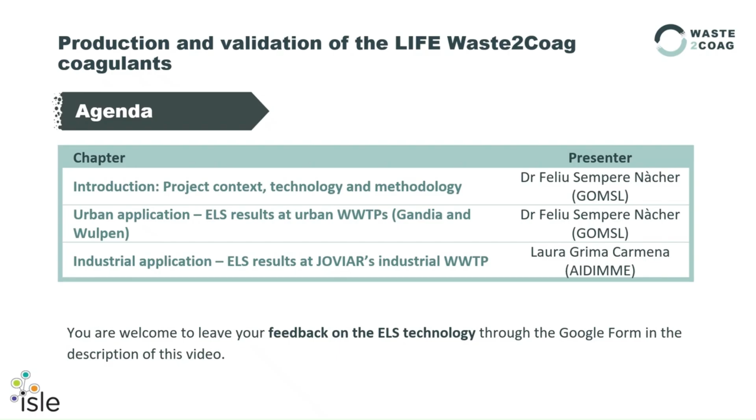Feliu Sempere Nàcher, R&D engineer from Global Omnium. In this presentation of the third webinar, I'm going to make the introduction of the project, outlining the project context, the technology, and the methodology.

LIFE Waste2Coag project had a budget of around 1.5 million euro, co-financed by the European Commission, and it has 5 partners: AIDIMME, the Institute of Technology Development working for the metal sector in Spain; Joviar, an SME manufacturer of technical metal components in Spain; ISLE Utilities, a global independent technology and innovation consultancy from the United Kingdom; Aquafin, a wastewater utility company in Belgium; and Global Omnium, which are the coordinators of the project, working in integrated water cycle.

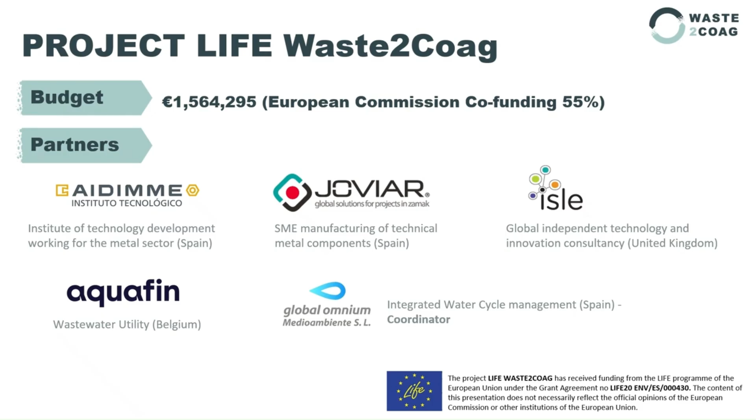The problem we want to solve with this project is the treatment of brines, with a production of around 142 million cubic meters per day produced only from desalination plants, from which 15% of their production is more than 50 kilometers of saline water bodies, mainly in China, USA, and Spain. And these brines are discharged without treatment.

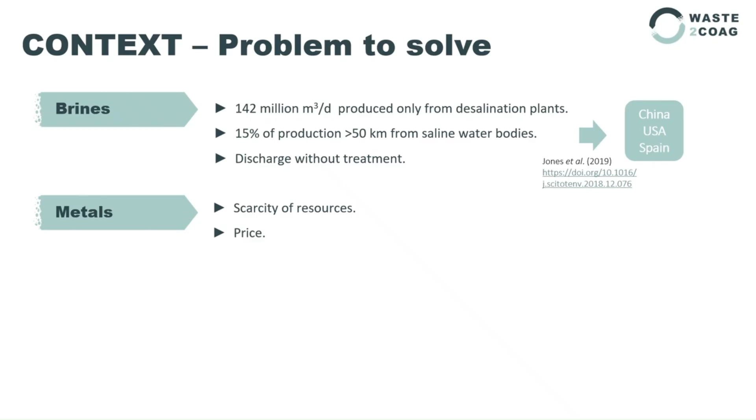We also have a scarcity of metal resources with a high price of these metals. And finally, we have also a high consumption of coagulants for urban and industrial wastewater treatment plants, which requires outsourcing them, with continuous price increments.

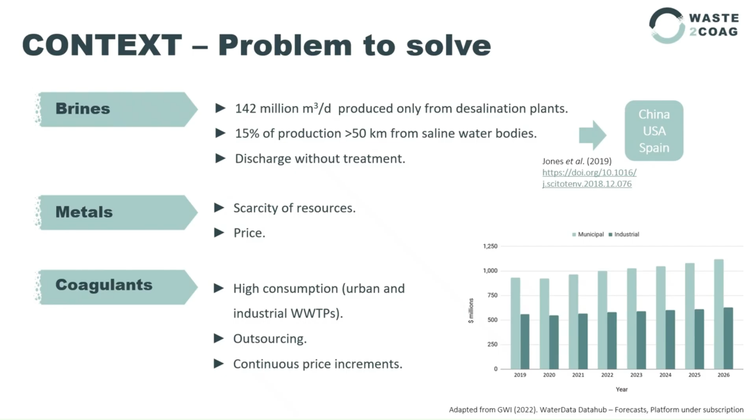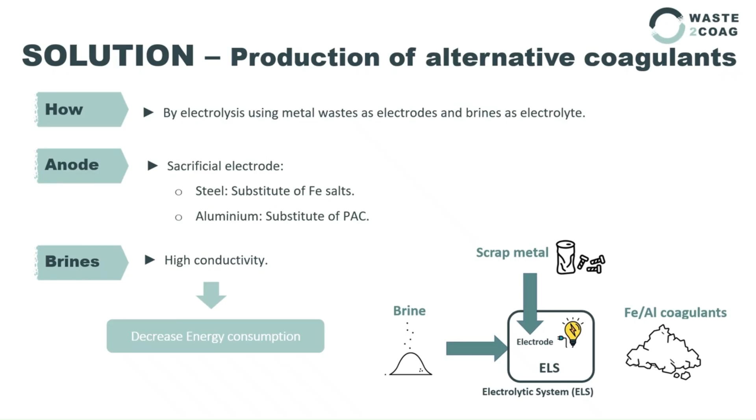Our solution is to produce alternative coagulants. We do this by electrolysis using metal wastes as electrodes and brines as electrolytes. In the anode, this sacrificial electrode, if we use steel, we produce substitutes of iron salts, while if we use aluminum as anodes, we produce alternative coagulants, substitutes of PAC. By using brines with their high conductivity, we decrease the energy consumption to produce these alternative coagulants.

The objectives of the project were technical: to design and construct an electrolytic pilot system, ELS, to produce coagulants valorizing these metal and brine wastes; validate these coagulants treating urban and industrial wastewaters; quantify the impacts by carrying out life cycle assessment and social life cycle assessment studies; and determine the economic potential by conducting a business plan.

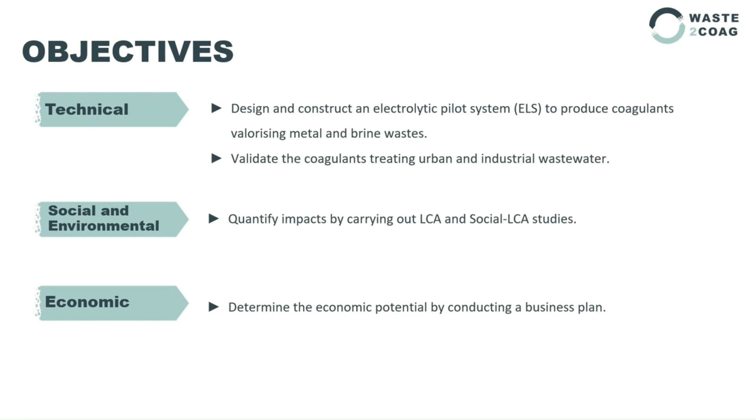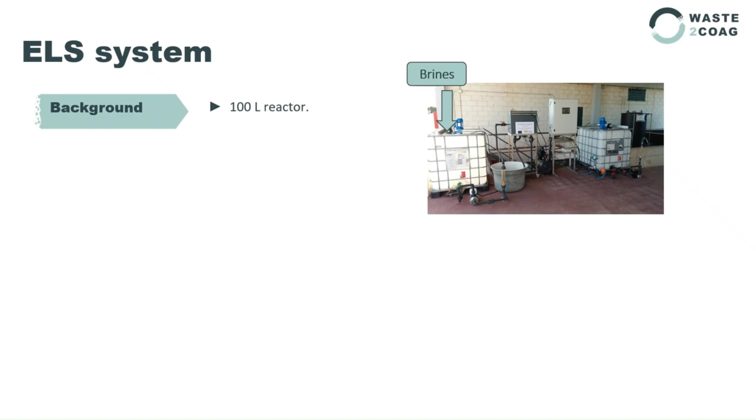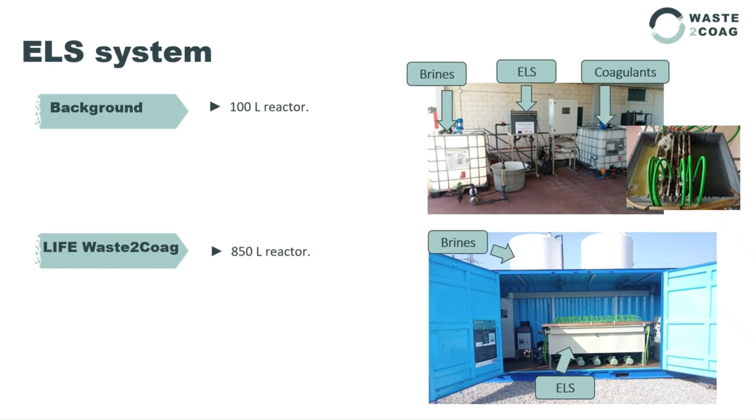This project started some years ago, so there is a strong background. Work started with a 100-liter reactor system, shown in this picture, with an IBC to collect the brines, the electrolytic reactor, and the tank for the coagulants. In LIFE Waste2Coag, the system has been scaled up from 100 liters to an 850-liter reactor with the same configuration: a vessel for the brines, the electrolytic reactor, and also a vessel for the coagulants.

The methodology implemented in the project required different phases, starting with the design and construction of the prototype, a second phase dealing with the optimization of the prototype operation, in which we selected adequate metals and brines to be used in the system.

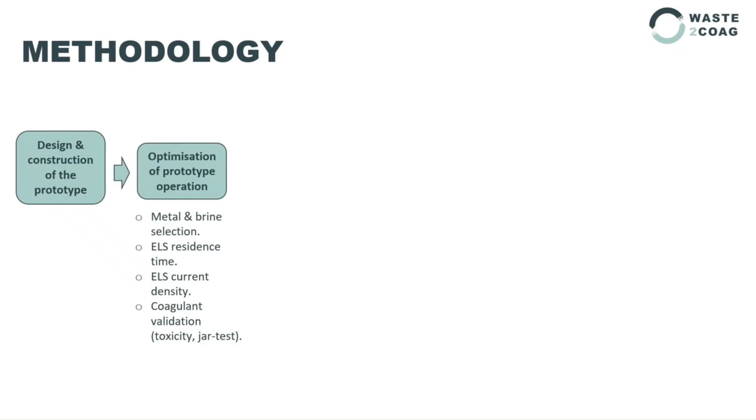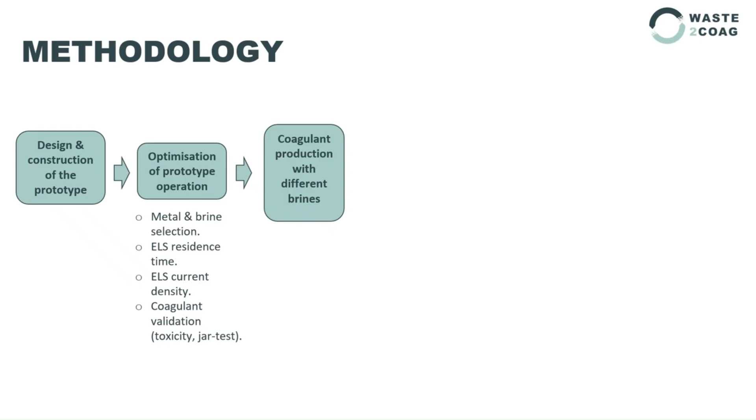We determined the optimum ELS residence time, the electrolytic residence time, the current density, and also the coagulant validation, toxicity, jar test. Once the prototype was optimized, we evaluated the production of the coagulants with different brines.

This has been made with brines received at Gandia Urban Wastewater Treatment Plant located in Spain, using brines from 3 industrial companies. This wastewater treatment plant receives around 26 cubic meters of brines per week, with a conductivity ranging from 30 to 50 millisiemens per centimeter.

Then brines from a company nearby Wulpen in Belgium, Wulpen Urban Wastewater Treatment Plant. These brines come from a drinking water facility really nearby the wastewater treatment plant, producing around 14,000 cubic meters of brines per week, which are discharged to the North Sea, but with a lower conductivity, 5 millisiemens per centimeter.

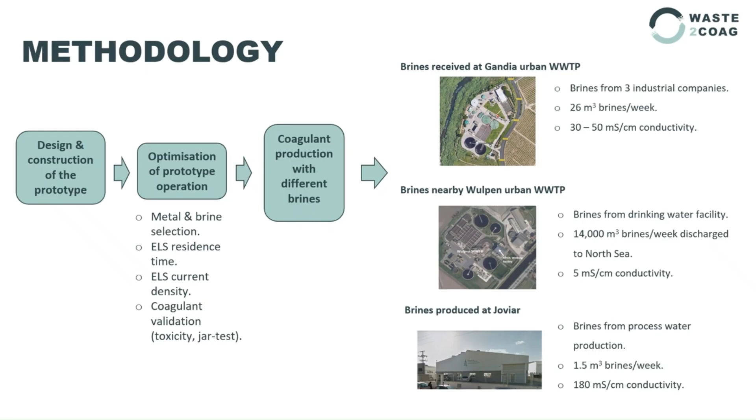Finally, industrial brines produced at Joviar facility, where they have an industrial wastewater treatment plant, were also used to produce the coagulants. These brines came from processed water that Joviar needed for their production process, producing around 1.5 cubic meters of brines per week, but with a very high conductivity of 180 millisiemens per centimeter.

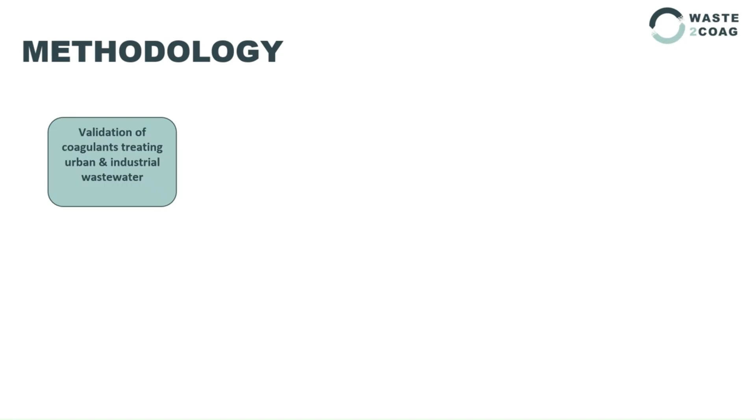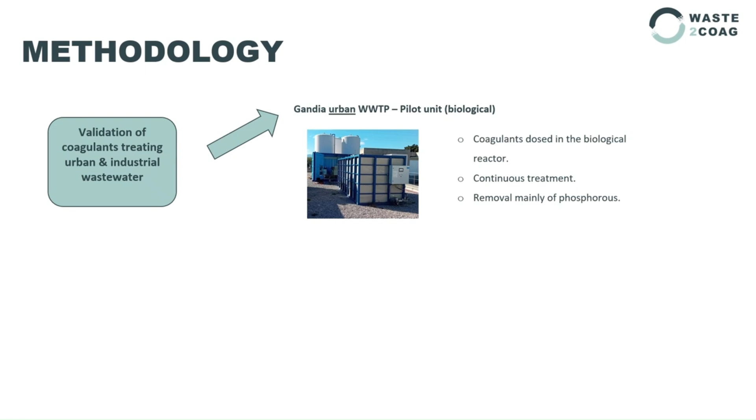Finally, the methodology included the validation of the coagulants treating urban and industrial wastewater. In Gandia urban wastewater treatment plant, the coagulants were dosed in the biological reactor of a pilot unit with continuous treatment, mainly removing phosphorus. And in Joviar Industrial Wastewater Treatment Plant, which is a physicochemical system, the validation of the coagulants was with a

batch treatment, discontinuous treatment. And in this plant, the waste-to-coag coagulant was an alternative treatment to the current coagulant based on lime. The objective of this demonstration was to remove the metals that Joviar has in their waters.

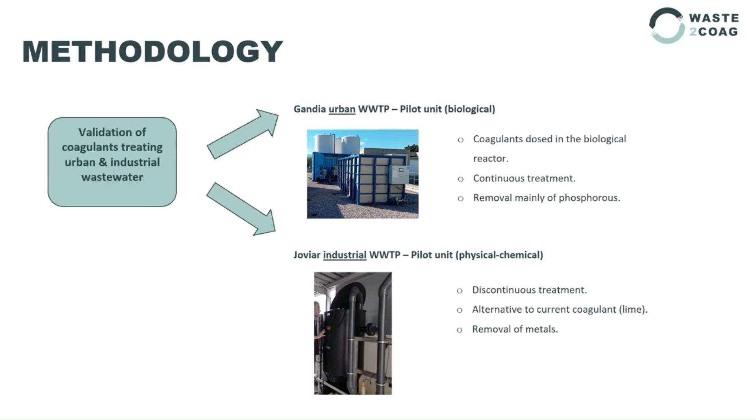Firstly, talking about metal selection, there were quality requirements. Different types of metal wastes were identified. The final selection was based on high purity in aluminium and iron, low price, and suitable shape to facilitate the electrode manufacturing.

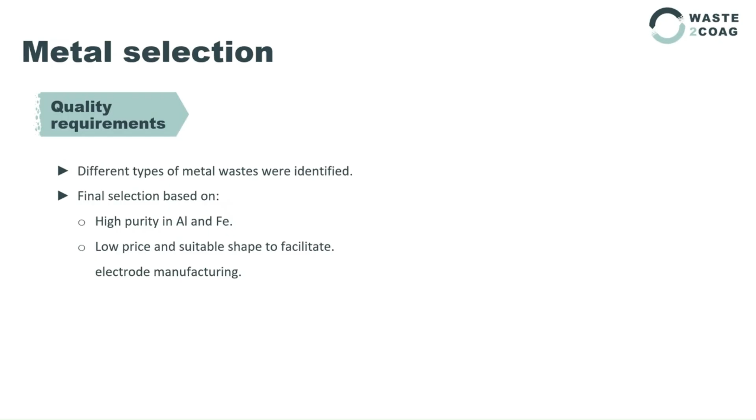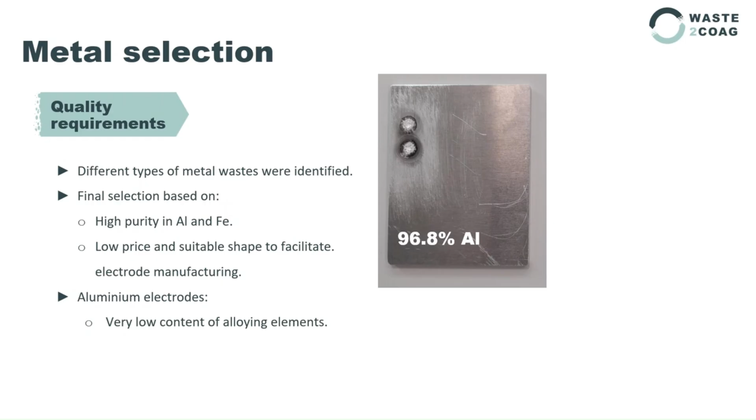The aluminium electrode had a high concentration of aluminium and very low content of alloying elements, and the iron electrodes were not stainless steel nor galvanized and had also a high purity of iron with below 2% carbon and very low content of chromium, nickel, and zinc.

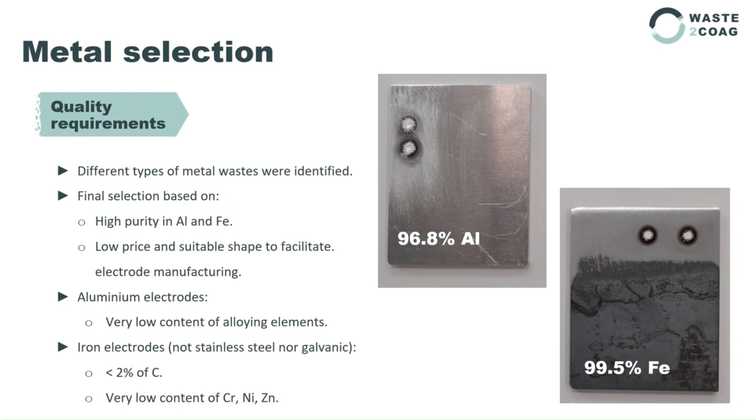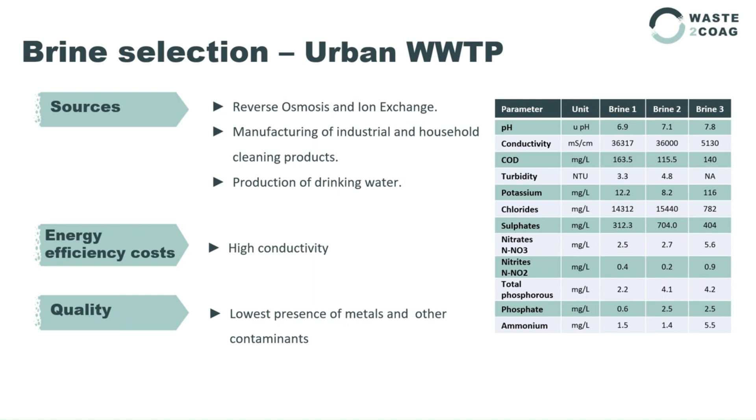In the case of Joviar, the industrial wastewater treatment plant, Joviar has a demineralization equipment which has different stages and separation of streams from resin regenerations carried out once per month.

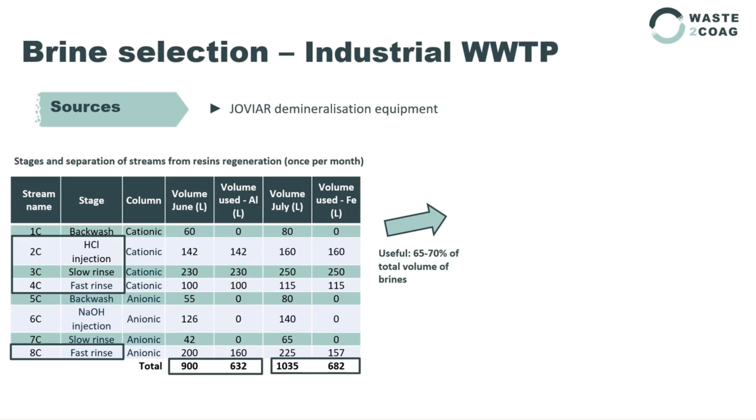In this table, you can see the different streams and stages with different volumes produced. And in this case, not all the stages of the brines were appropriate to be used in the electrolytic system to produce the alternative coagulant. So a range of 65 to 70% of the total volumes of brines, which is a high percentage, was valorized to produce the coagulants.

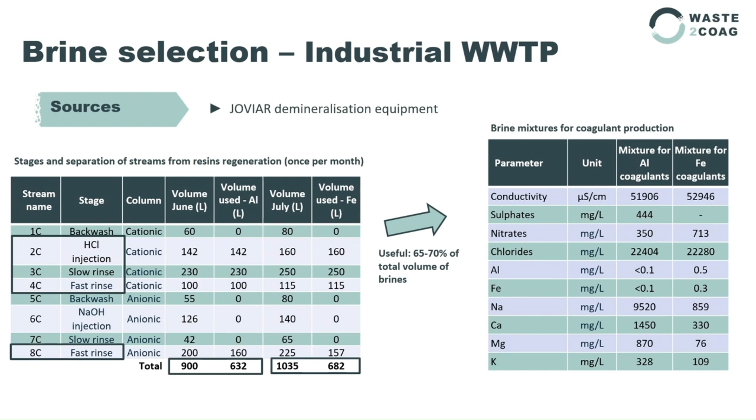This mixture of brines has the characterization shown in the right table.

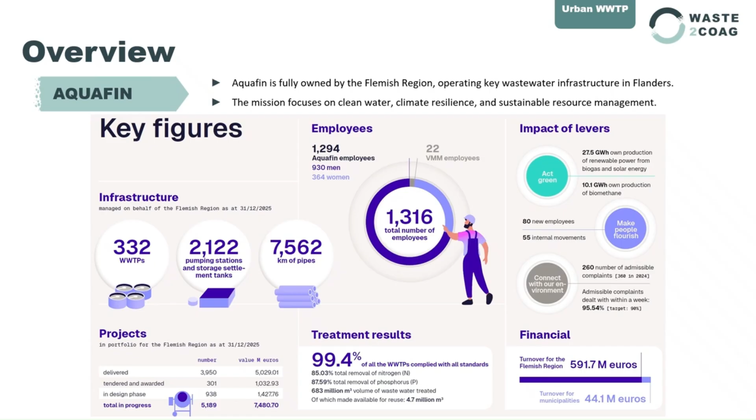Their treatment results show more than 99% compliance with all the standards of their wastewater treatment plants, with a financial turnover for the Flemish region of almost 600 million euros.

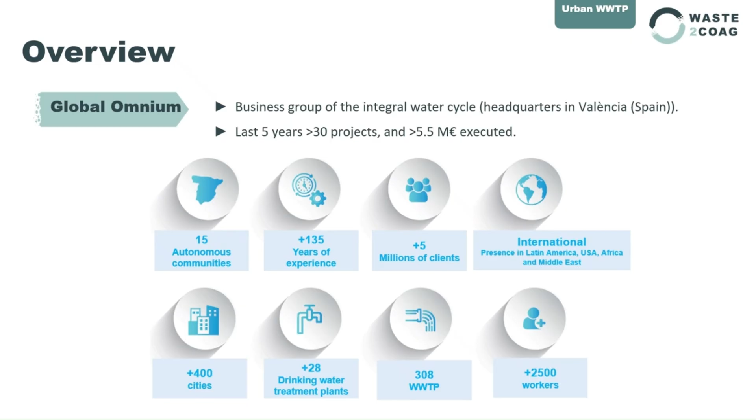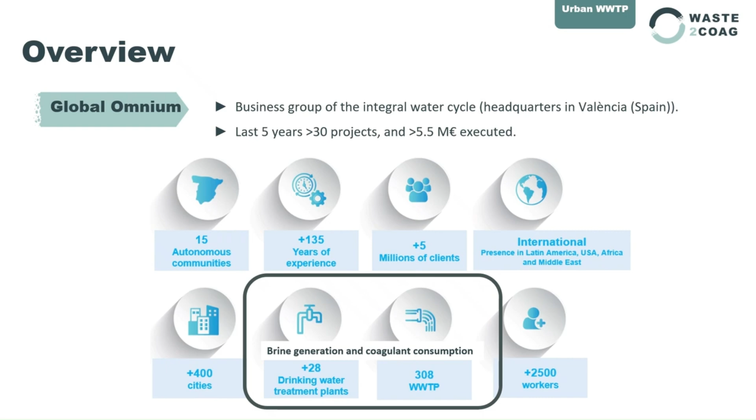Global Omnium, operating Gandia Wastewater Treatment Plant, is a business group of the integral water cycle with headquarters in Valencia, Spain. In the last 5 years we have executed more than 30 projects with more than 5.5 million euros executed. It has more than 135 years of experience, international presence in Latin America, USA, Africa, and Middle East, and it operates drinking water treatment plants and also wastewater treatment plants. So we have brine generation and coagulant consumption in the same company, operating in the integral water cycle with more than 2,500 workers in the group.

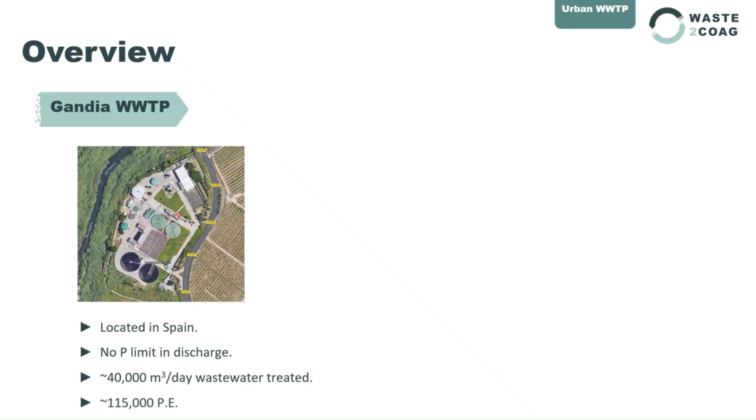Gandia Wastewater Treatment Plant is located in Spain near the Serpis River. It doesn't have a phosphorus limit in discharge since it discharges to the sea, and it treats around 40,000 cubic meters per day of wastewater.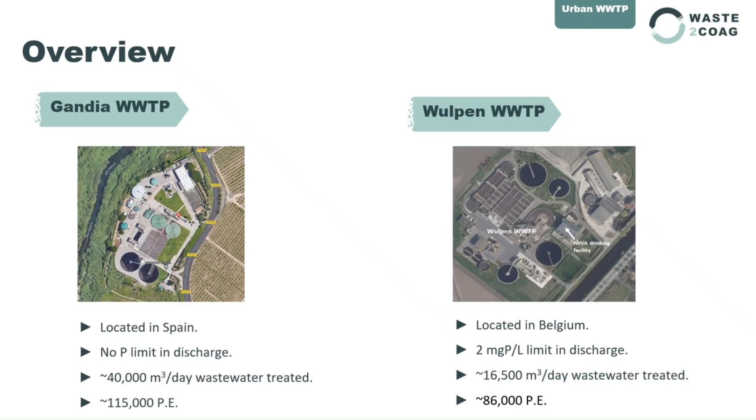Wulpen in Belgium has a 2 milligrams phosphorus per liter discharge limit, treating around 16,500 cubic meters per day of wastewater.

The results of the coagulant production: firstly, we used iron electrodes, but we experienced faster deterioration than expected due to the type of brines treated in the process. We experienced electrode delamination and breakage, which increased the current tension and the energy consumption in the system, implying also an increase in personnel maintenance hours, as you can see in this picture, where the deterioration of the electrodes is shown.

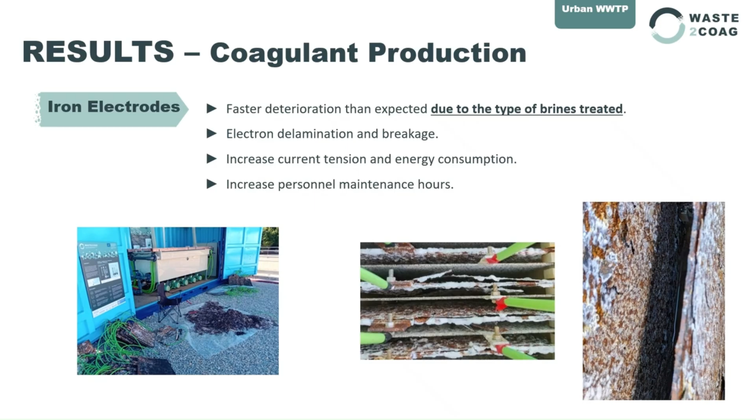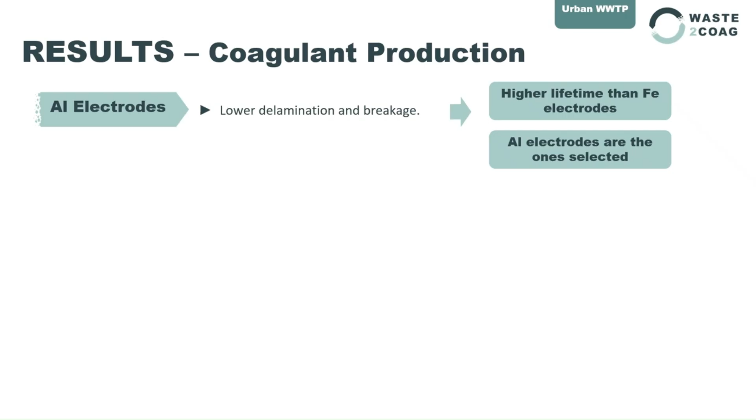On the other hand, when using aluminum electrodes, there was lower delamination and breakage, so a higher lifetime than when using iron electrodes. So the aluminum electrodes were the ones selected to produce the alternative coagulants, hence producing aluminum-based coagulants as substitutes of PAC. In this image, we can see the process.

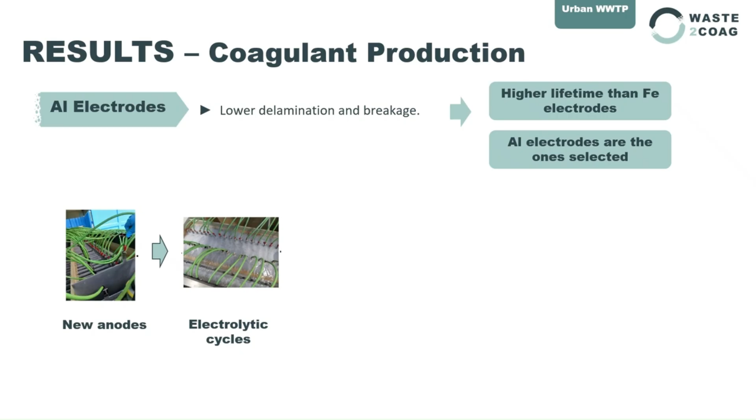New anodes were introduced in the system. The electrolytic cycles were carried out. Once they were spent, the removal of the anodes and cathodes from the reactor was done. Cleaning of the cathode also had to be done, and then the installation of the new anodes and clean cathodes in the system to continue producing more coagulants.

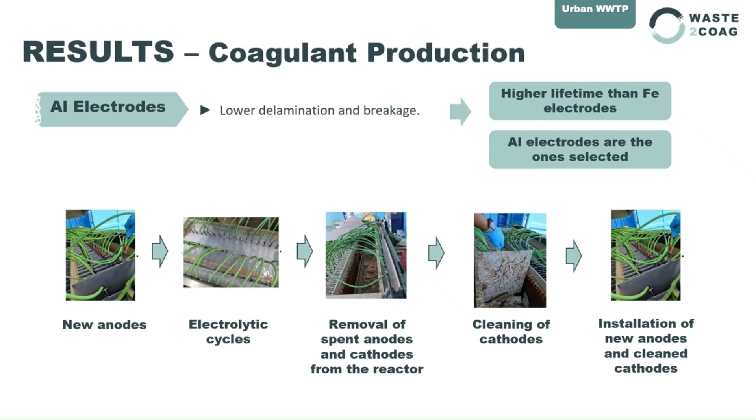About the coagulant production, in this graph we can see the metal concentration, the aluminum concentration, versus the electrolysis time for the two current densities applied. What we can see is that, as expected, the higher density produced higher metal concentrations in the coagulants.

During the production of the coagulant at the higher current density and at 2 times the minimum contact time applied, it was obtained a metal concentration in the coagulants of 977 milligrams of aluminum per liter using the brines of Gandia, and 910 average concentration using the brines of Wulpen.

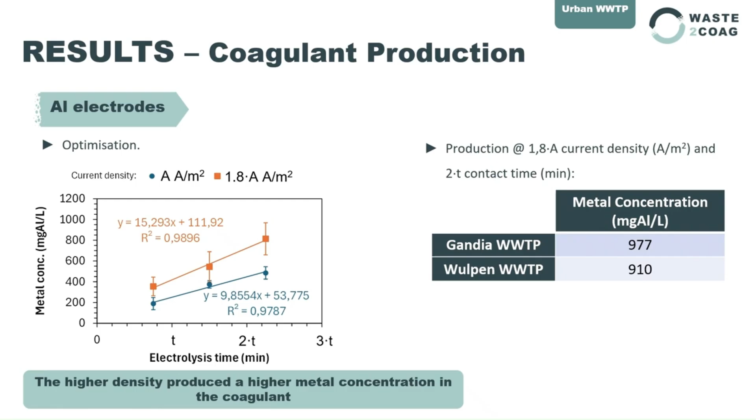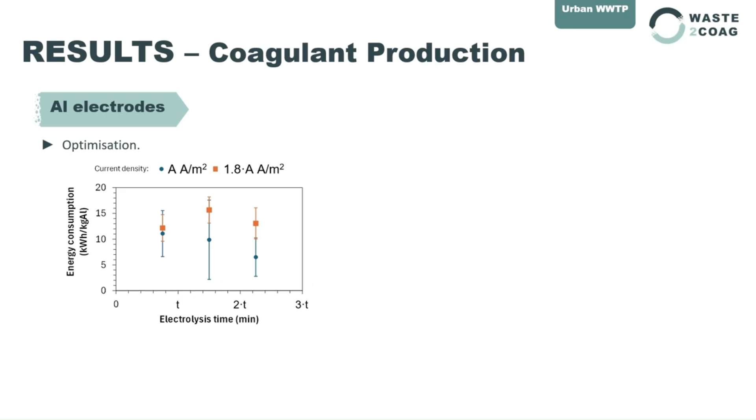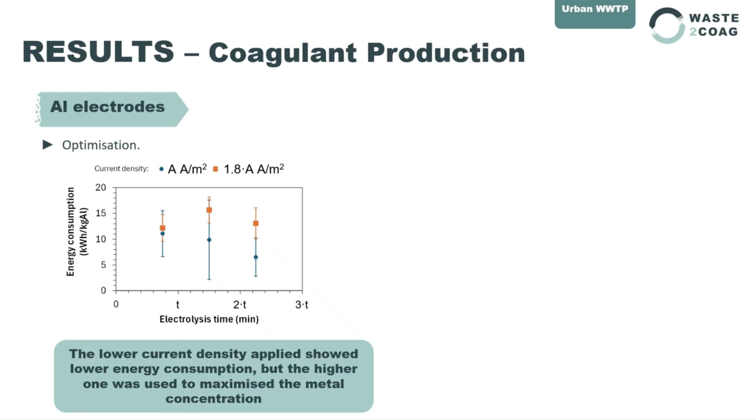In this graph, we can see the energy consumption versus the electrolysis time for the same current densities applied. What we see is that the lower current density showed lower energy consumption, but the higher one was used to maximize the metal concentration in the coagulants.

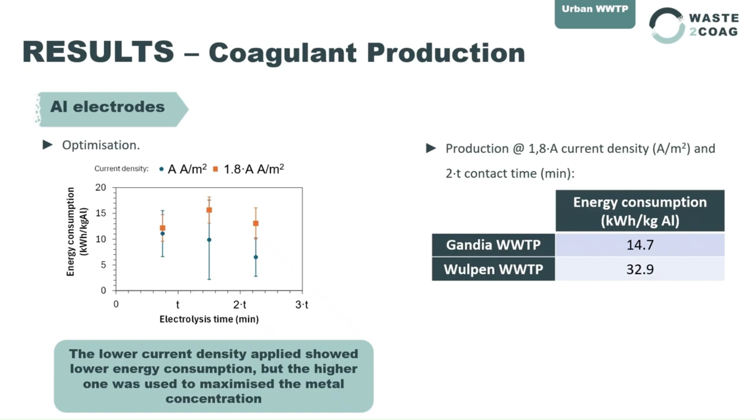During production, as we can see in this table, Gandia wastewater treatment plant had brines with higher conductivity, so an energy consumption of almost 15 kilowatt hours per kilogram of aluminum was obtained, while in Wulpen this energy consumption was higher due to the lower conductivity of the brines produced there.

To guarantee a safe application of the waste-to-coag coagulants in urban wastewater treatment plants, respirometry tests were carried out to evaluate toxicity on both autotrophic and heterotrophic bacteria. This was done using different samples of activated sludge and adding a concentration of the waste-to-coag coagulant using different types of brines. What we can see in this table is that the ammonium uptake rate was higher when using the waste-to-coag coagulants with the two types of brines tested, and also the heterotrophic respiration was higher when using this coagulant, which means the coagulant didn't inhibit the biological process. This guarantees a safe application in the system.

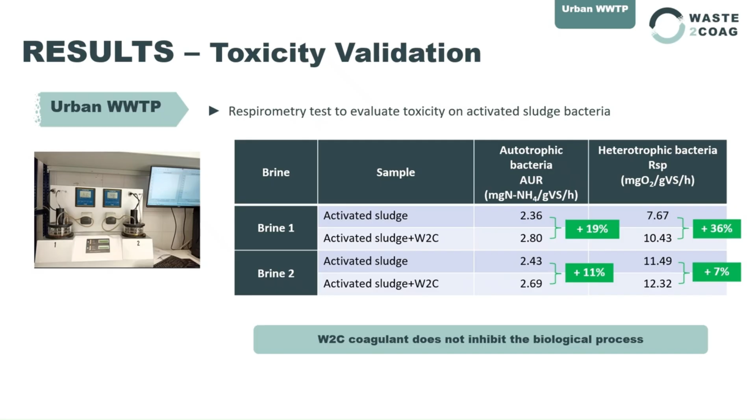Also, jar tests were carried out at different aluminum concentrations, targeting phosphate removal, with selected doses from 5 to 20 milligrams of aluminum to be scaled up during the application in the pilot.

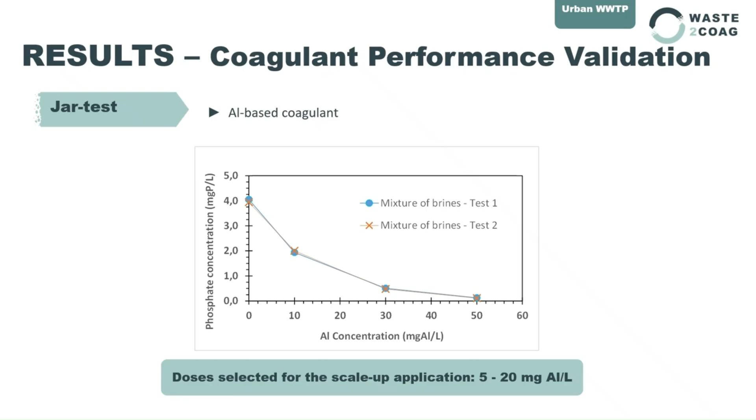The operating conditions during the validation treating urban wastewater in Gandia were to produce the coagulants as mentioned before, with the objective to reach the maximum aluminum concentration and to have a higher valoration of each volume of brines. The applied current in the electrolytic system was fixed with a higher current density using aluminum electrodes and the higher contact time to maximize aluminum concentration.

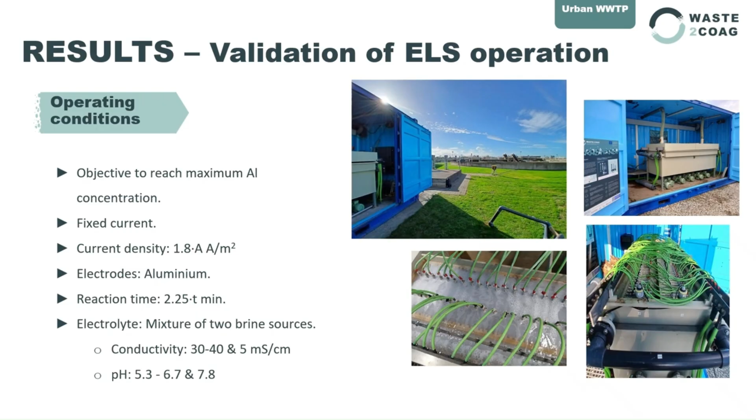The electrolyte was a mixture of two brines with conductivity ranging from 30 to 40 millisiemens per centimeter and pH ranging from 5 to 7. You can see in these pictures the prototype installed in Wulpen and in Gandia.

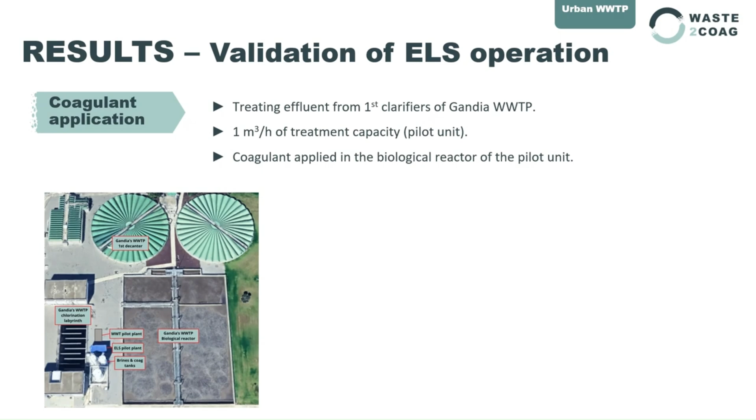The coagulant application was done in Gandia, treating effluent from the first clarifiers of Gandia wastewater treatment plant. The treatment capacity was set at 1 cubic meter per hour, and the coagulant was applied in the biological reactor of the pilot unit, which we can see in this picture, with a static clarifier.

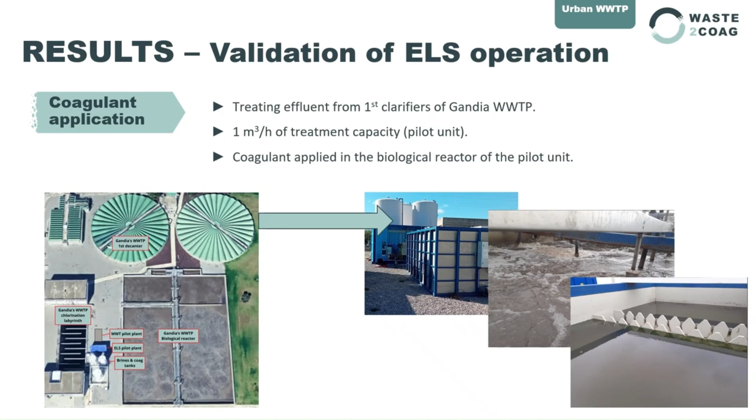In this table, we show the results at different doses from 0, 5, 10, and 20 milligrams of aluminium per liter, targeting COD, phosphate, also showing the removal of total phosphorus, suspended solids, and also the turbidity.

What we can see in this table is how the optimum dose was fixed at 10 milligrams of aluminium per liter, obtaining around 60% removal of total phosphorus and 76% of COD, with average turbidity removal of 85%.

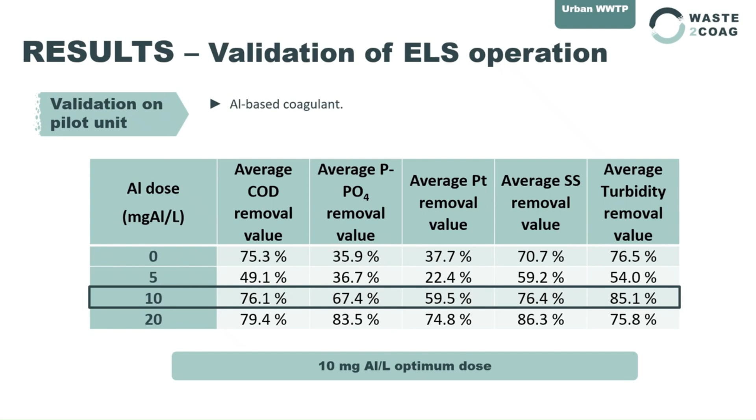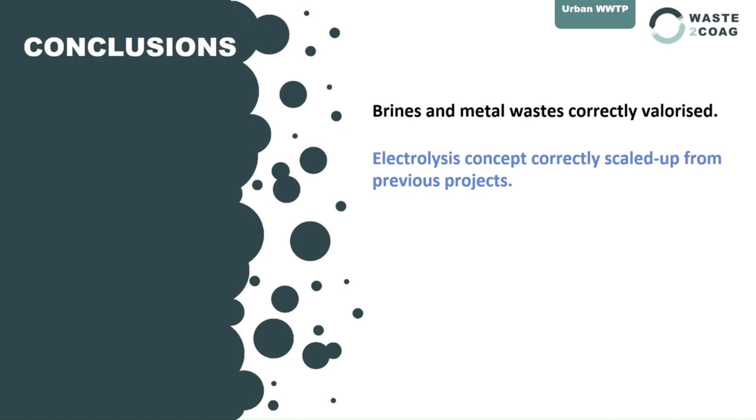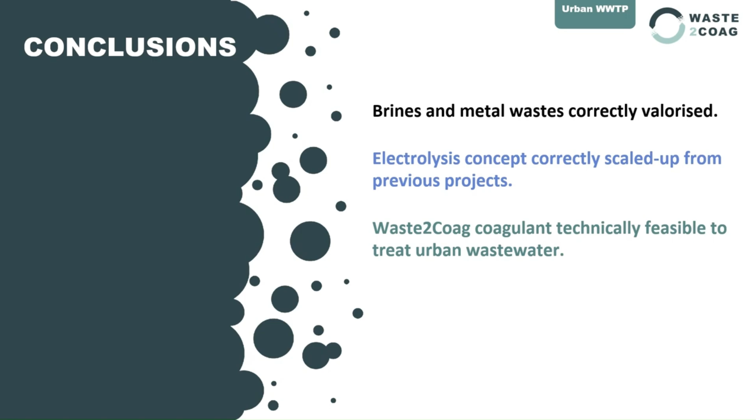Hence, as a conclusion of this validation in urban wastewater, the brines and metal wastes were correctly valorized to produce the Waste2Coag coagulants. The electrolysis concept was correctly scaled up from previous projects, and the Waste2Coag coagulant was technically feasible to treat urban wastewater in Gandia.

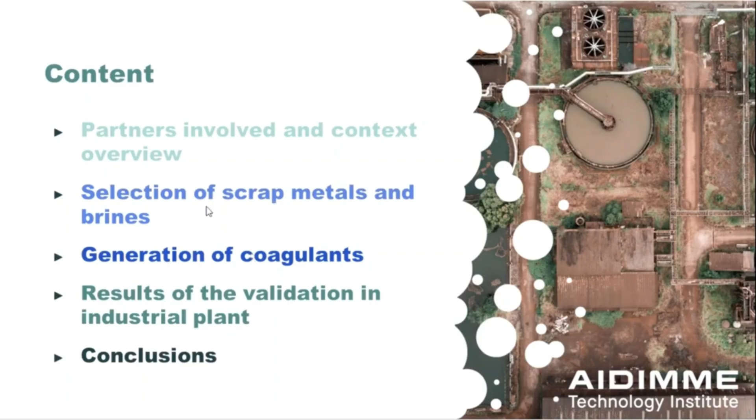As a brief introduction to AIDIMME, we are a research center focused on metal and wood processing, as well as packaging and related industries. Our mission is to improve the metal, mechanical, and wood sectors in their products and processes. Our services include research and innovation projects, technological services, and laboratory analysis, as well as education through different masters and specialized courses.

Our industrial partner in this phase is Joviar, a company based in Alicante, whose main activity is the manufacturing of technical pieces through Zamak injection. They also produce molds and carry out electrolytic finishes. Joviar has more than 60 years of experience in this field, which makes it an excellent partner to validate this technology.

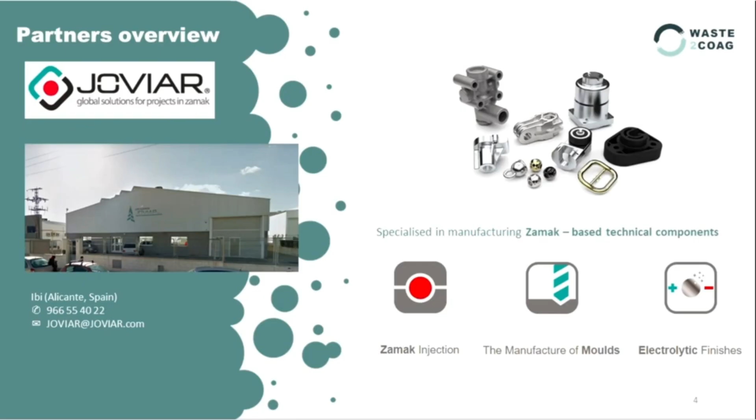As an overview of the context, we have three problems to solve. On the one hand, we have the brines, which have a high generation worldwide, coming mostly from desalination plants due to the scarcity of water. These brines are normally discharged without treatment, which has a negative environmental impact as they increase the salinity of the ecosystems. Then, for the metals, there is a global scarcity of raw materials, which combined with political instability results in an increase in the price of these metals. So it would be very interesting to recover as much as we can, including these scrap metals.

And finally, the coagulants. There is a high consumption of coagulants worldwide, used both in urban and industrial wastewater treatment plants. They are normally outsourced and are subject to constant price increases. Both the prices and the demand are expected to increase because of the stringent requirements in effluent concentrations.

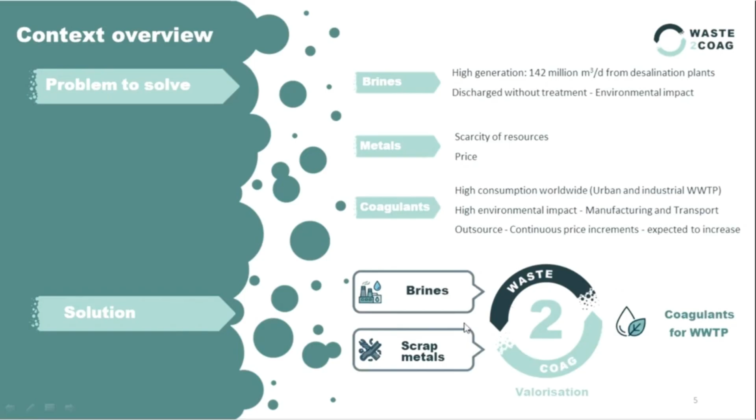So our proposed solution is to valorize these two wastes and transform them into resources as new reagents for the water treatment plants. We do this in the project through electrolysis, which is the way to valorize these two wastes into coagulants. Let's look at the details of our process.

As we mentioned, scrap metals and brines are the main inputs of the plant, but we cannot accept any type of waste. As with any other project or process, we need to carefully assess the quality of the metals and brines that go inside the system.

First, for the selection of metals, we have to evaluate the quality, meaning their composition, to avoid water contamination, the inhibition of the biological treatment, and of course to ensure the good quality of the coagulants produced. We also have to make sure that the shape, the thickness, and the dimensions were compatible with our specific pilot, and of course the price and availability of those metals. Even though they are scrap metals, they are not for free and they still have a cost.

On the other hand, we had to identify the most suitable source of brines for our ELS system. Brines can come from desalination plants or purification systems, particularly from sectors that use high quality water in their processes. The characterization of brines is essential to ensure they have no pollutants, such as heavy metals, that compromise the quality of the coagulants. We also checked the conductivity, which is a key parameter, as power consumption is directly related to it. The higher the conductivity, the lower the energy consumption of the process.

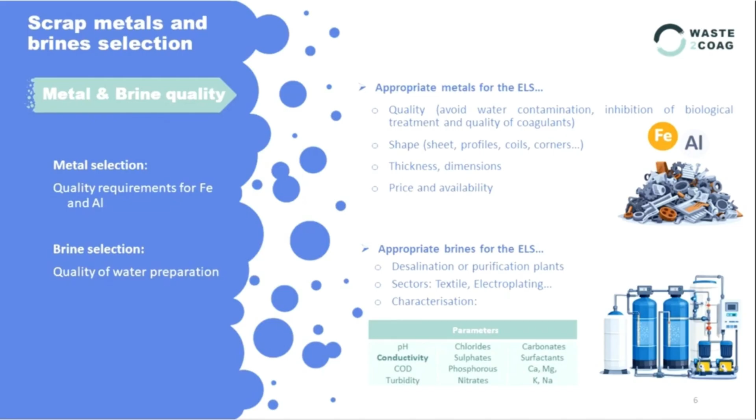Joviar requires pure water for their high quality processes, so they need to treat their water using a demineralization equipment as the one in this scheme, and which is the one in the picture.

The characterization of the brines is essential, as this equipment generates several waste streams during its cleaning cycles. That means we cannot use them directly, but have to prepare the optimum mixture. What we did was choose and mix the different streams from the anionic and cationic columns to create an adequate mix for the input of the pilot system. In the end, we were able to use up to 70% of the streams generated, which also represented a direct saving for the company in waste management costs. The values of the parameters measured were within the optimum range defined for the system.

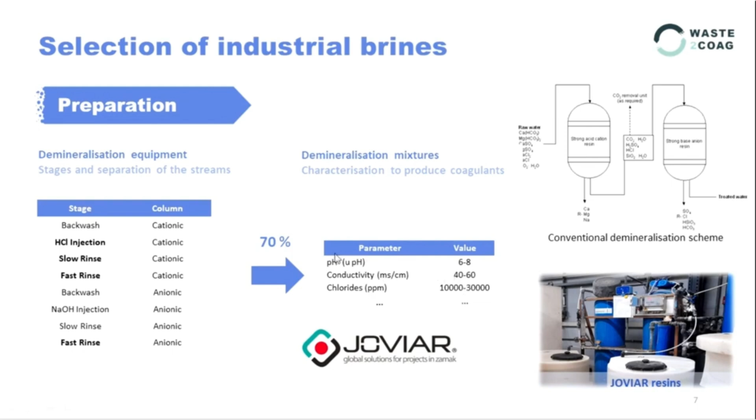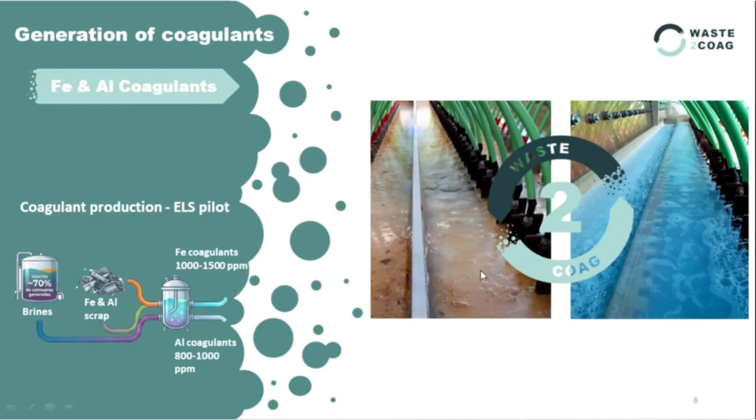So the next step after getting these brines is the generation of coagulants. As you can see in the picture, we introduced the brines from the company, the mixtures prepared from the demineralization equipment, into the ELS pilot. We produced both iron and aluminium coagulants. The concentration achieved for iron was around 1,000 to 1,500 ppm, and for aluminium 800 to 1,000 ppm. As you can see in the picture, they have a very characteristic appearance depending on the metal used. This one is iron and this one is aluminium.

So with the coagulants produced, we move on to the most important step of this phase, which is testing them in Joviar's water treatment plant. That means replacing the conventional coagulants. First, we defined the optimum dosage of the coagulant using jar tests, and then introduced these coagulants into the mixing tank of their plant.

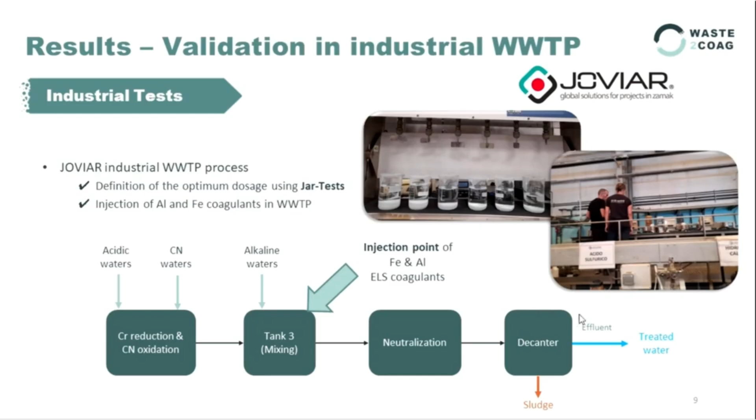As you may know, the surface treatment sector treats waters with a high content of heavy metals, so our goal was to demonstrate that we could effectively remove them from the effluent water. The results were very good, as we achieved removal efficiency above 90% for all metals, that is zinc, copper, chromium and nickel. Besides, the treated water met the EPSAR discharge limits, which means this water was efficiently treated and can be safely released to the sewer.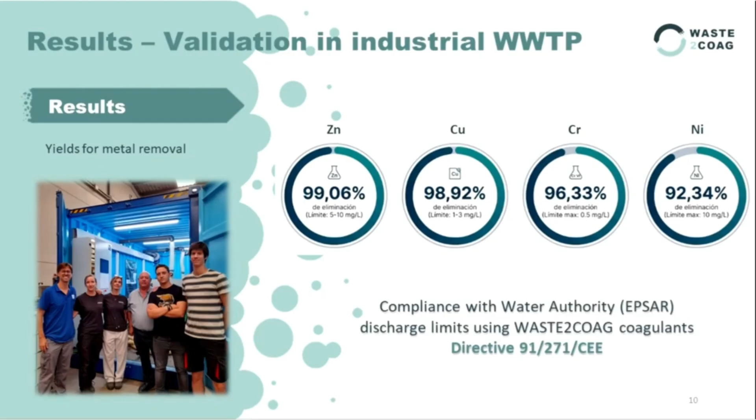This validation shows that our coagulants perform at least as well as conventional alternatives in a real industrial setting.

As for the life cycle assessment, we also carried out an initial life cycle assessment to compare the environmental impact of our approach versus the conventional treatment using lime. As an overall comparison, the conventional treatment generates more than 1.4 kilos of carbon dioxide, while the aluminium and iron coagulants produced in the project generate 1.3 and 1.2 respectively, as can be seen in the graph. If we look at the details in this study, we see that the main cause of this difference is the production and transport of the conventional coagulant, as well as the sludge generation, which is higher for the conventional coagulants.

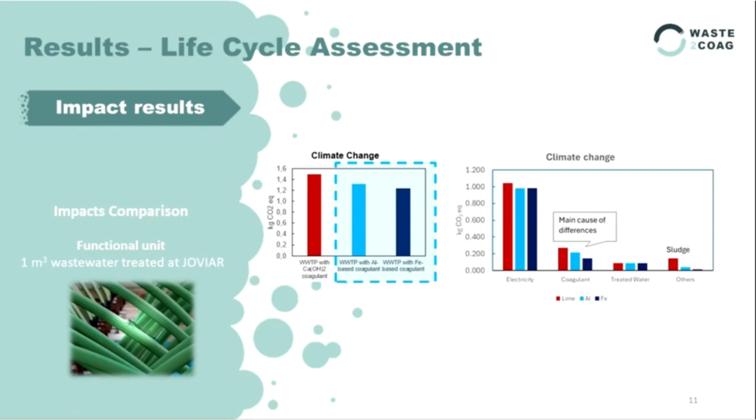So finally, to sum up, we performed the characterization of Joviar's industrial brines and obtained suitable mixtures for the ELS treatment, allowing the valorization of 70% of the brines on site. We also demonstrated that the coagulants produced are safe and effective for the removal of heavy metals, so the water can be discharged in compliance with EPSAR regulations. The life cycle assessment confirmed that our approach has a lower environmental impact compared to the conventional coagulants. Overall, this phase of the project has proven that our technology offers an efficient, scalable and robust valorization of metal scraps and industrial brines, turning waste into resources.